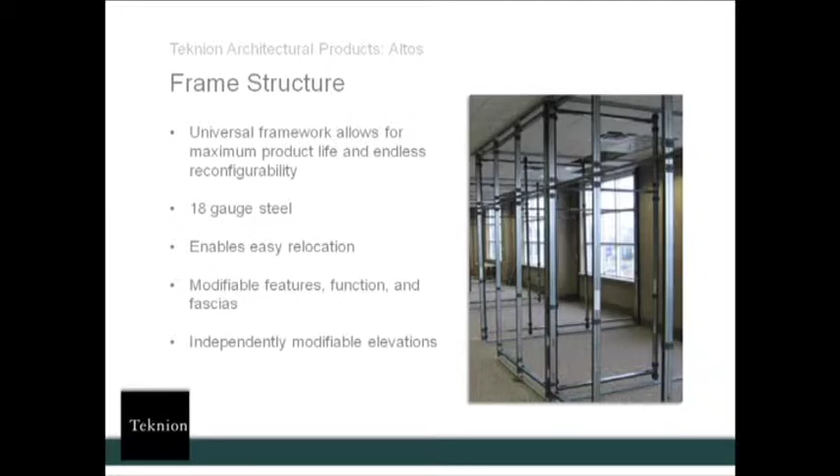So first, let me grab this little mock-up wall we use in presentations just to give you a better idea of what the wall looks like. We start with our ceiling channel — this is the track Kelly's pointing at, made of 18-gauge steel, and this whole thing is very heavy. It's going to either hook into your ceiling tile system or be drilled directly into your drywall ceiling above — it can attach to any ceiling condition. It has integrated holes where you can route your data and electric, and it's got a rubber gasket material on top that filters light and sound from going into the neighboring room.

Then we've got our base channel, and this is what sits directly on the finished floor, carpet, VCT, wood, anything like that. This offers additional stability to the wall with rubber grippers, so there will be no slippage, or if it's a long wall, we can drill directly into the floor. We've also got a rubber gasket on the bottom to block light and sound.

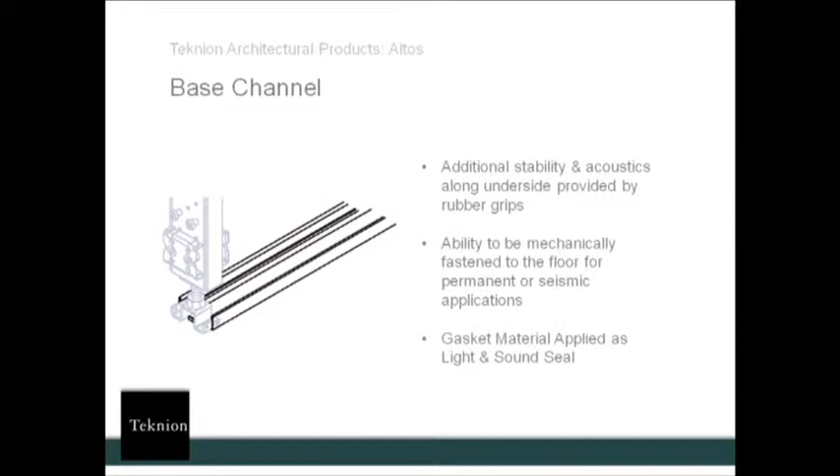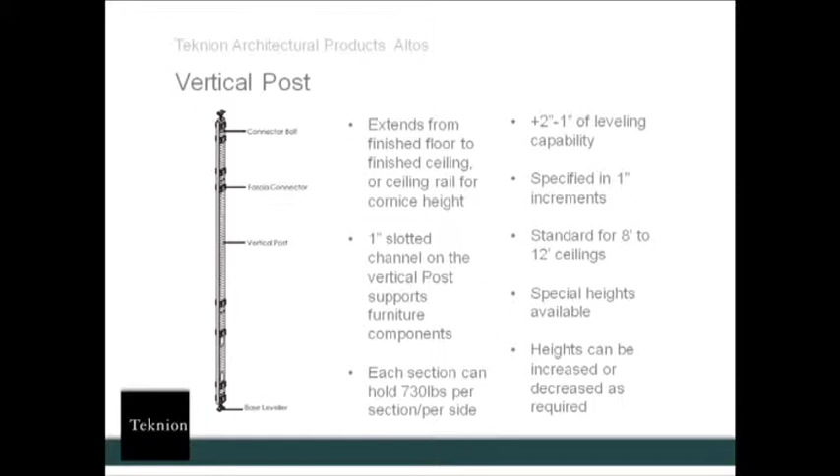Then we're going to come in with our vertical post, again 18-gauge steel, similar to general construction with the same type of components. It's got 1-inch slots going all the way down the steel vertical post where you can hang furniture, much like on a wall or furniture panel system. It extends from the finished floor to the ceiling, with leveling capabilities on the top and bottom to level it from 1 to 2 inches. It's standard for 8 to 12-foot high ceilings, and your heights can be increased or decreased according to your site conditions.

So if you're going from a 12-foot room to a 10-foot room, we can just cut that 18-gauge steel frame down in order to remove the fascia, and you've adjusted it for a shorter room. Or if you're going from an 8-foot high room to a 12-foot room, order a splice kit, order more steel framing, order an additional fascia. So you can see how this really contributes to the sustainability of the construction. Again, we can do custom heights.

Then we're going to come in with our horizontal rail. This is what gives it its extra stability, and this is structurally required at 6 inches above the floor and 6 inches from the ceiling. You can see Kelly's pointing at it there. And once you've taken that fascia off, there's a 2.5-inch cavity on the inside for routing cabling and electric.

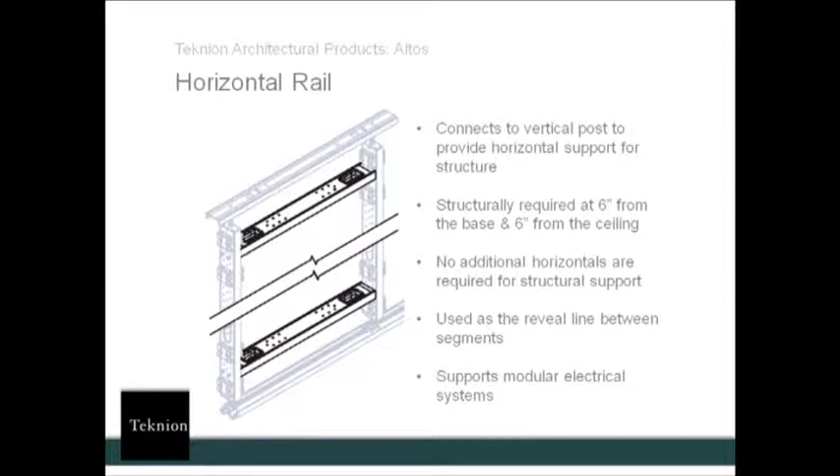It also allows an aesthetic reveal between fascias. You can see it creates a black line, so you can designate those reveals anywhere you want, but they're always going to be at least 6 inches from the ceiling and 6 inches from the floor for that stability.

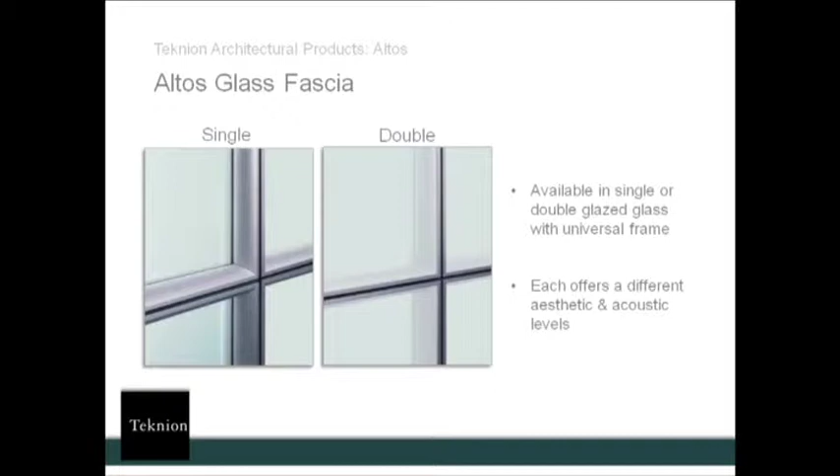Here you can see some of our standard wall elevations. Monolithic, which is going to hide all your horizontal reveals and give you a beautiful look, especially if you use wood. Your full height is going to show your base and ceiling fascias. Segmented working wall - these are all different options, but we can really do anything that you specify, any customization of the wall. We've done it, we'll probably do it again. We rarely do anything that's standard, it seems like. So anything your creative mind can come up with, we can do it.

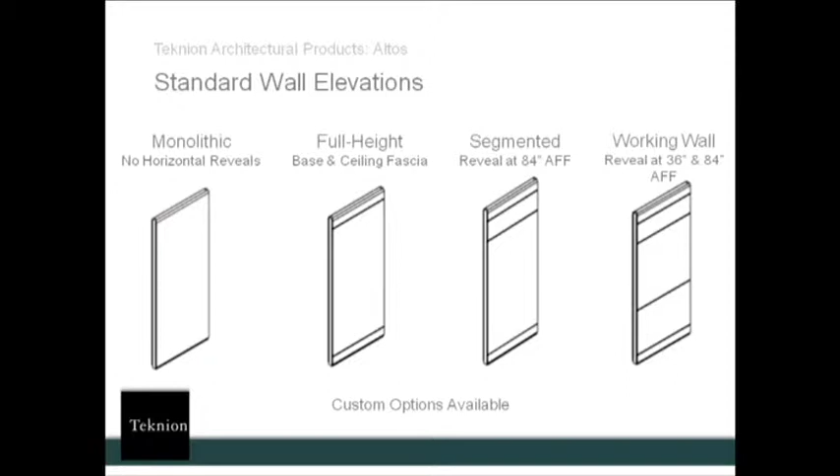Altos doors, here's some options. We've got a pivot door, hinged, pocket, barn, double barn. These are available in glass, laminate, wood, laminate with glass inserts.

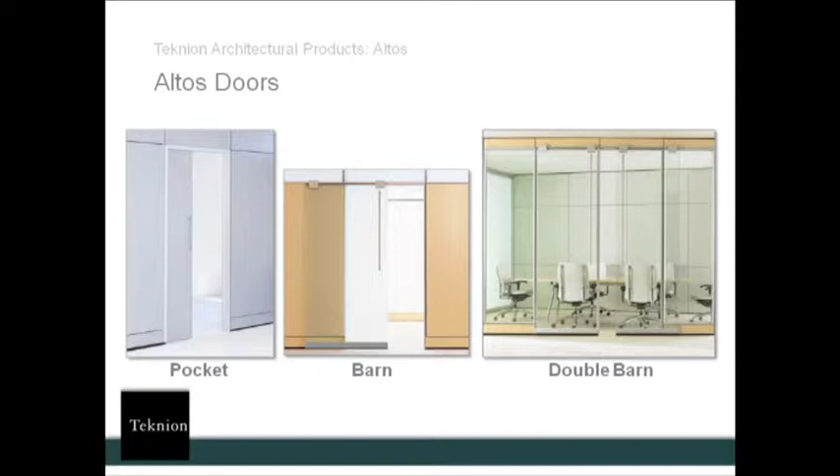So our next product that we're going to talk about is called Optos, and this is our seamless glass wall. The beautiful thing about Optos is that it can span 26 feet without a vertical support. It offers full glass panels up to 10 feet high and seamless transparency. The way it's constructed is a base channel and a ceiling channel, like you see here.

And these obviously are going to be affixed permanently to the floor. This glass is made of 10 millimeter glass that's butt jointed together with a 2 millimeter silicone tape. So it offers a really great looking aesthetic as opposed to some of the wall systems that have like a plastic H channel or that ugly gooey tape that turns yellow over time.

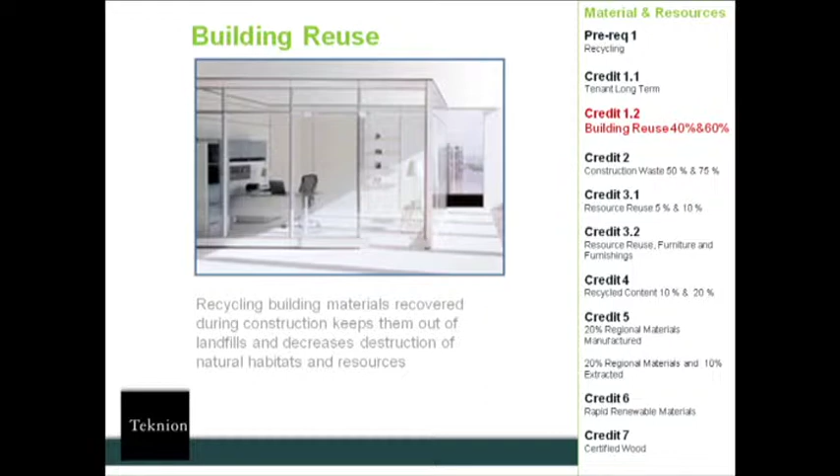This is going to pertain to credit 1.2. Recycling building materials recovered during construction keeps them out of landfills and decreases the destruction of natural habitats and resources. Construction waste, credit 2: the utilization of recyclable or reclaimed packaging materials obviously is going to avoid waste.

Altos walls do not require cutting of finished floors or ceiling tiles since it sits directly on the finished floor and clips into the ceiling tiles. You're not having to recarpet, patch, send things to the landfill.

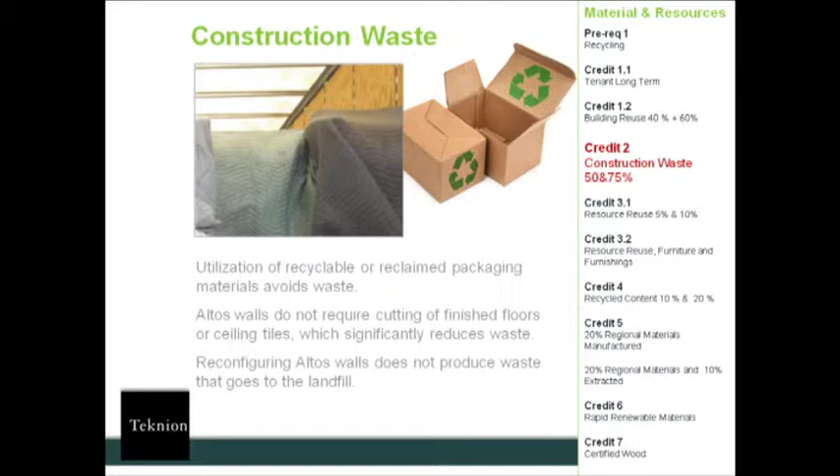Energy optimization, credit 1.1 and 1.2. You can really reduce energy consumption in lighting through the use of our glazed panels. So really the goal is to use glazing anywhere you can.

Credit 1.1 addresses energy required for lighting power. So the use of glazed panels and demountable walls helps improve lighting efficiencies and really affects the amount of energy consumed by artificial lighting. And then credit 1.2 addresses energy performance that can be gained using daylight response controls within 15 feet of the windows.

Material reuse, credit 3.1 and 3.2. Obviously, Altos can be reused, reconfigured, altered in any way to fit your changing site conditions.

Recycled content, credit 4. We're a contributor to that. So a good rule of thumb with reconfigurable wall systems, or any product, is to look for a product that's 90% recyclable, so that there are fewer components going to the landfill.

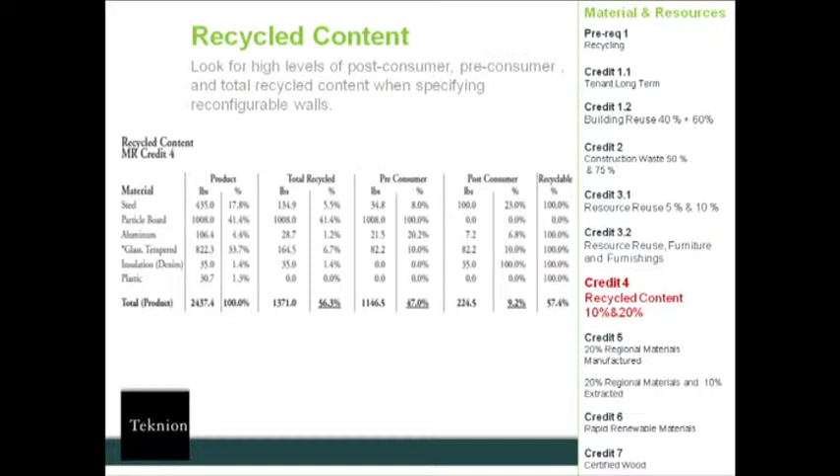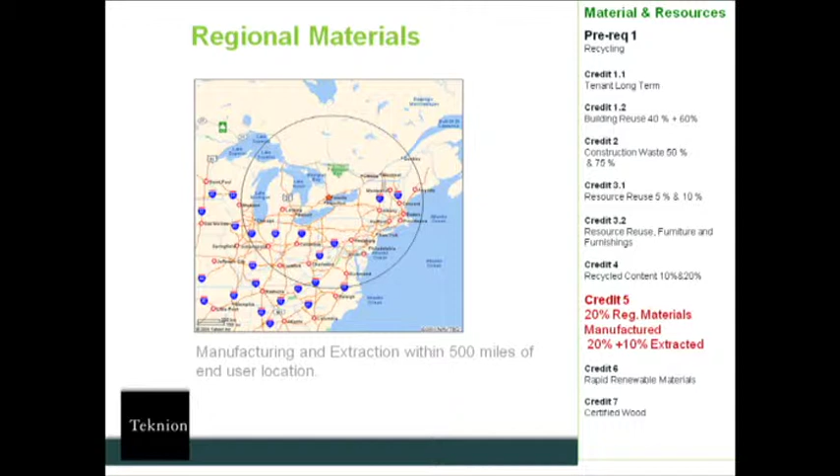Regional materials: manufacturing and extraction within 500 miles of the end user location. Now, Teknion walls are produced in Canada, so that's not going to pertain to maybe the framing, but if you're working on a project that uses wood or glass, you can have the framing shipped in and still get your glazing and your wood from a local resource. That's credit 5.

Certified wood: we can get FSC certified core materials. That is an option offered by Teknion. We actually also use flintwood veneers that assist with this credit since they're harvested from an FSC certified forest.

Construction, indoor air quality management during construction. So really the goal here for credit 3.1 and 3.2 is to use contractors that understand indoor air quality during construction. Altos walls are manufactured in a factory, they come to you pre-assembled, so you're not creating dust into the HVAC system. This is really going to protect your workers during construction.

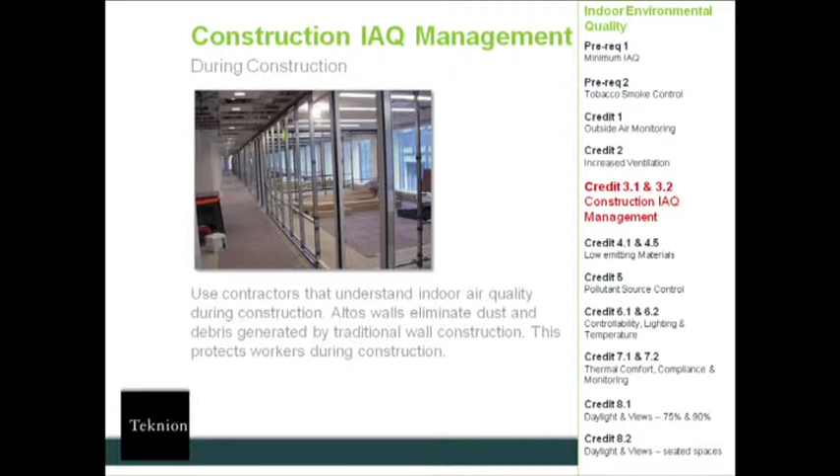Construction indoor air quality management pre-occupancy. Our walls are Greenguard Certified, so they're going to meet the criteria of indoor air quality pollutants that are allowable during pre-occupancy testing.

Low emitting materials: again, they're fully assembled in a factory, so you're not going to require field assembly that involves sealants, adhesives, anything that's going to create VOCs. Credit 4.1 and 4.5. No added urea formaldehyde is available on our particle board or MDF.

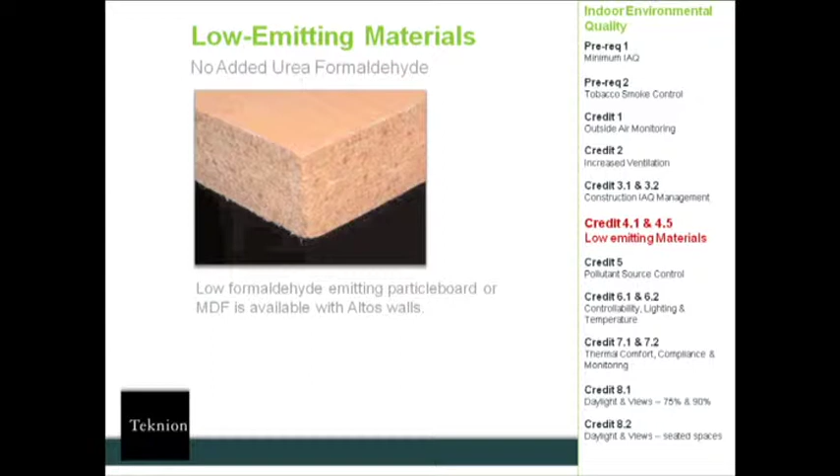And daylight and views: Altos walls specified with glass storefronts and return glazing is going to increase the viewing area and access to daylight. That's going to give you credit 8.1 and 8.2.

And there's your innovation and design credits, 1.1 through 1.6.

So how do Teknion wall systems really contribute to the changing workplace? Shifts in workplace design mean we have to focus on a lot of things now, not just sustainability, but also employee satisfaction, rising cost of real estate, constant fluctuation in the workplace, and really your cost of ownership.

Employee satisfaction and performance rely on access to daylight and views. We call this our right to light at Teknion. Physiologically, daylight's an effective stimulant, so we're always looking for daylight. A lot of electric light sources attempt to mimic the spectrum of daylight, but it's just not the same as natural daylight.

Psychologically, we all desire a view to the outdoors. So really the goal, again, is to specify glass everywhere possible.

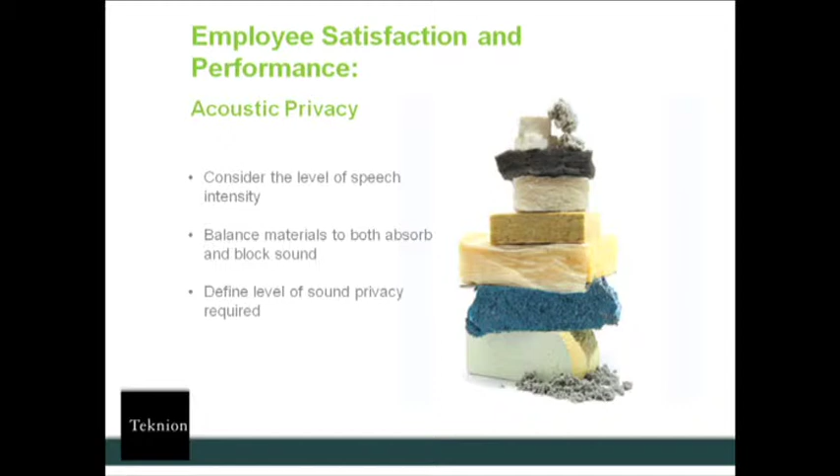Acoustic privacy—we do have the option of adding insulation into our walls, and we actually use a recycled denim product. It is actually recycled blue jeans, and it is blue. It's really cool, but it does offer that added acoustic ability that we saw in that chart.

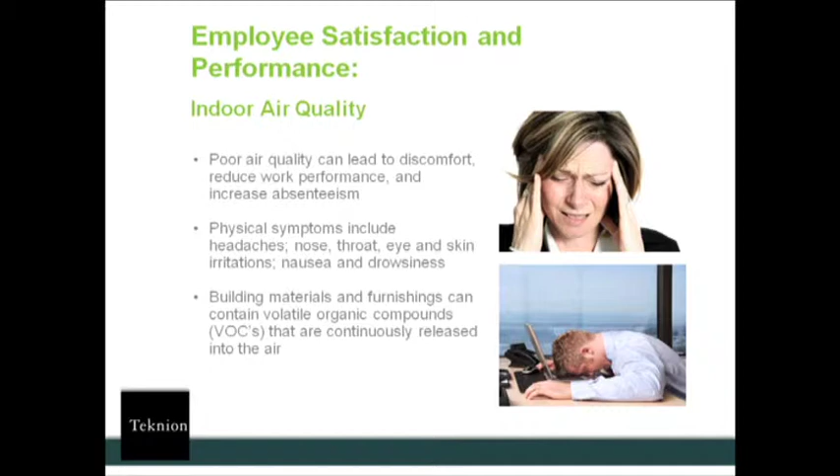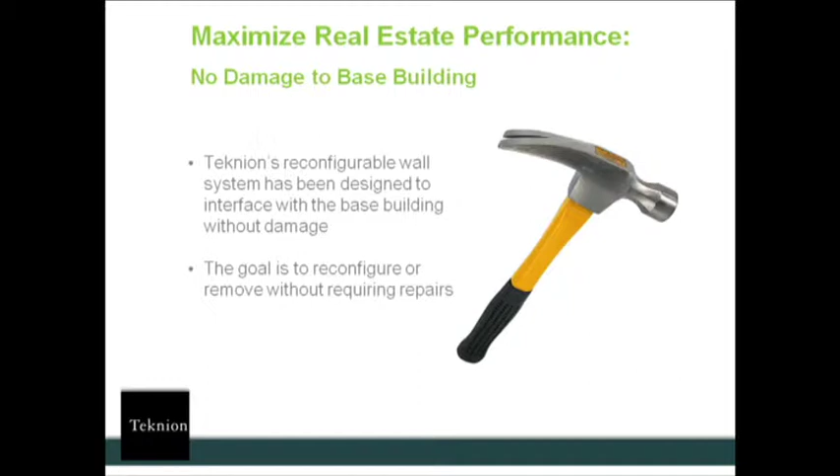Maximizing real estate performance also means creating collaborative spaces. Don't have a designated conference room that's used 10% of the time. Have touchdown collaborative areas where you can really accommodate people for impromptu meetings.

How do we increase our asset performance? Well, a really good tip here is to maintain an inventory of frequently used components—parts and pieces, fascias, things like that on hand for easily reconfiguring your space.

It's also a good idea to train an in-house installation team for minor repairs or changes. You can even do this during the workday—there's no noise really when Altos goes up. It all goes together with a rubber mallet, other than when you drill into the architecture of the building. So you're not going to incur overtime, after hours, weekend fees for installation when you can do it during business hours.

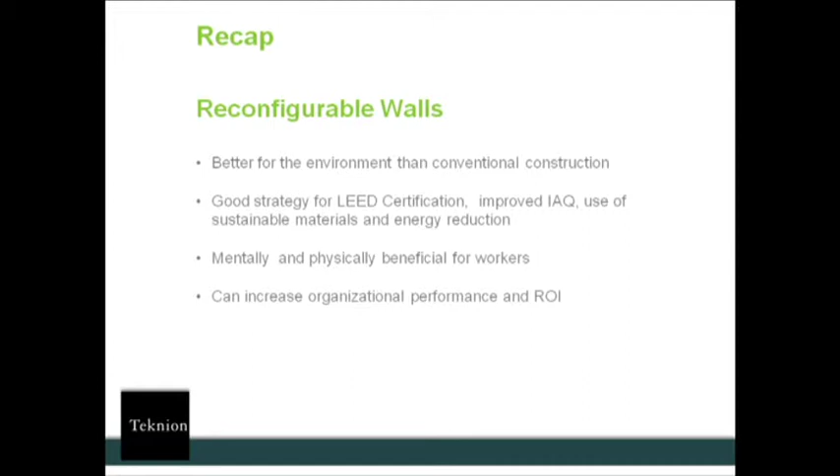So really a recap: reconfigurable walls are obviously better for the environment than conventional construction. They provide mental and physical benefits for the workers and really increase your ROI.

Do y'all have any questions?

Yes. The local distributors here in the valley, do they have any sort of interlocal cooperative purchasing agreement contracts, like TXMAS or BuyBoard, Tips, Taps, PCPA?

They do. Do you want to answer that? Yeah, I mean, we're on Texas contract, GSA. We're definitely on contract for walls and systems. And I did a small comparison, about 500 square feet, traditional aluminum window frame glass panels versus reconfigurable, and it was about 5 times the cost.

Of course, the payback is how many times are you going to change it thereafter. In that application, it didn't make sense because we weren't going to change it probably for a long, long time.

Sure. But right now, I'm thinking of a building where we do need a staging building that we can reconfigure about once every year—reconfigure it, move someone in there, renovate their current area—and I'm thinking it would make a lot of sense. Do you have any sort of approximate premium that this would cost above sticks and bricks that you typically use?

It's hard to compare, they're just two completely different animals. The upfront cost is always going to be more. But when you're talking specifically aluminum and glass, that's easier to compare - those average about the same.